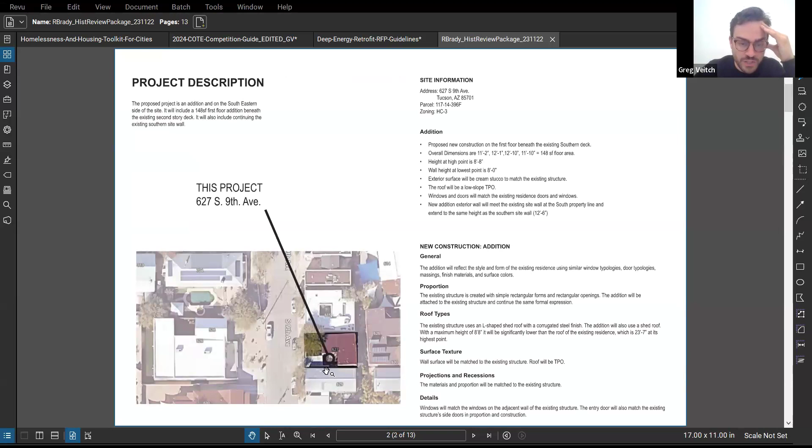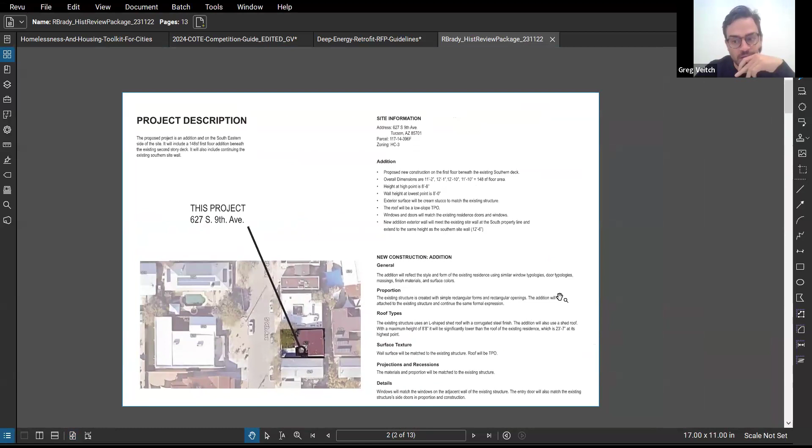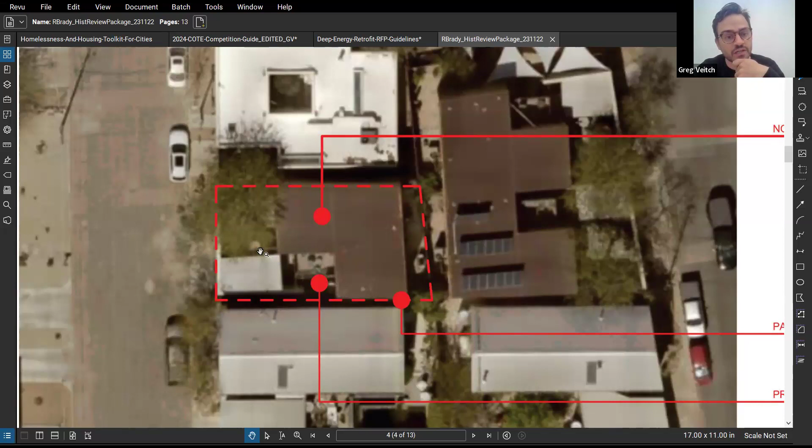This project is on South 9th Avenue, a Rob Brady project. There is an existing second floor deck indicated here, and the project will essentially fill in the space below that deck. Here's another aerial. It will have no change in the existing footprint. The carport will stay intact, and the front yard will stay intact where you see that existing tree. The one change, as Jody mentioned, is the recommendation to move a cistern, currently under the deck, back to the location next to the carport when that area gets filled in with construction.

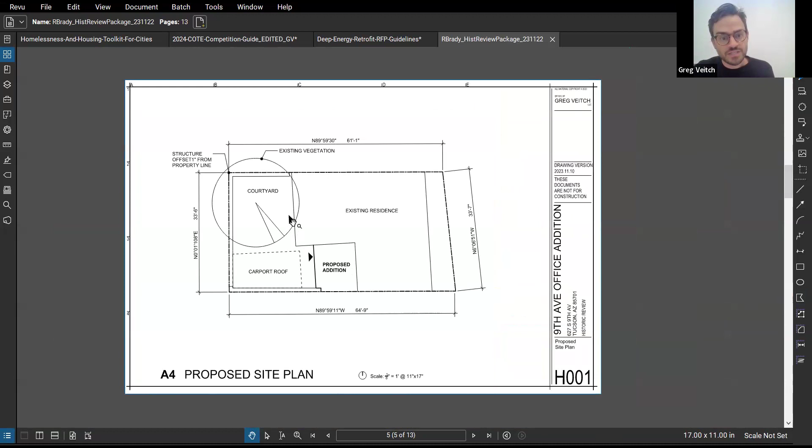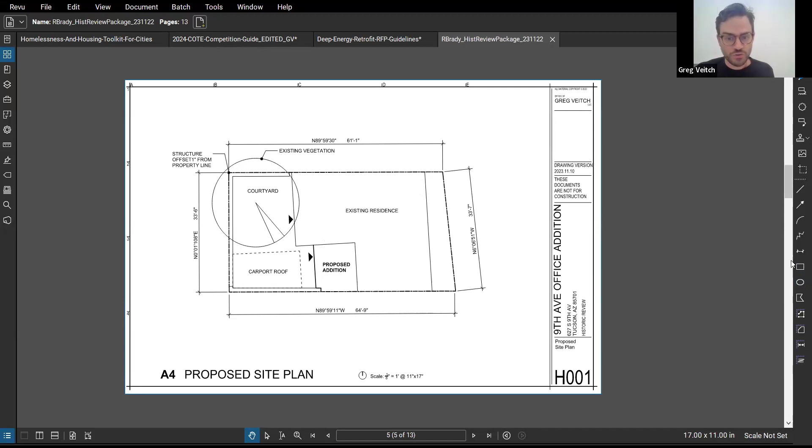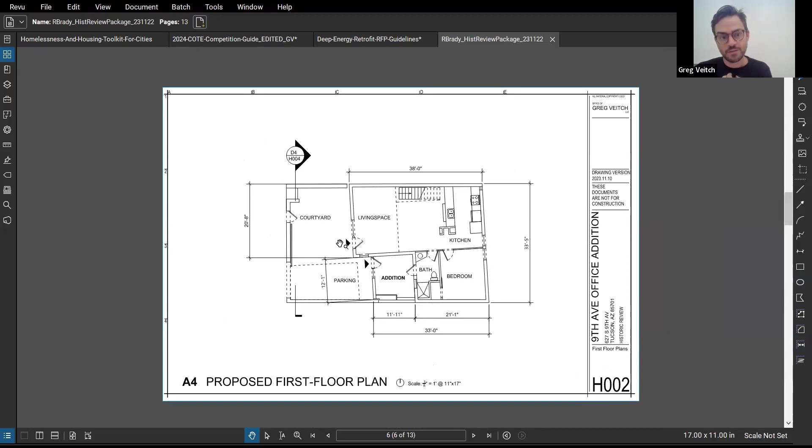Here's the proposed addition. We're currently proposing a secondary entrance, this is a studio essentially, so the existing entrance is indicated here. The proposed entrance will be connected and accessible through this residence, but it's going to have its own distinct use. There will be no changes to the existing residence on the inside or on any of the facades except for the filled-in addition, and the street frontage, the street wall, will not change either. Here's an idea of what it might look like: entrance, a window, some storefront, some storage, and maybe a connection through to the bathroom. Once again, the parking does not change, and the courtyard access does not change.

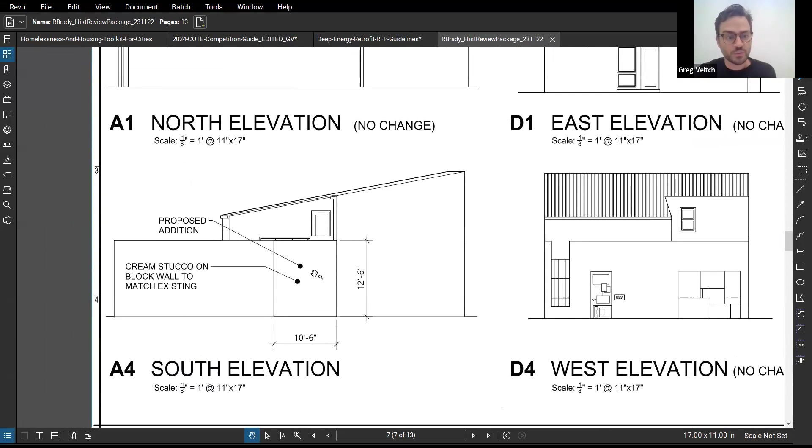So, west elevation, this is the street facing elevation, no change on this elevation, but I'll show one shortly where you'll see the addition. South elevation, this is the existing property line. It's built right to the property line since this is a commercial or office zone. There's currently a hole filled with galvanized corrugated metal that will be filled in with CMU and stucco to match the existing block wall. That's the side of the addition. The north elevation and east elevation have no changes.

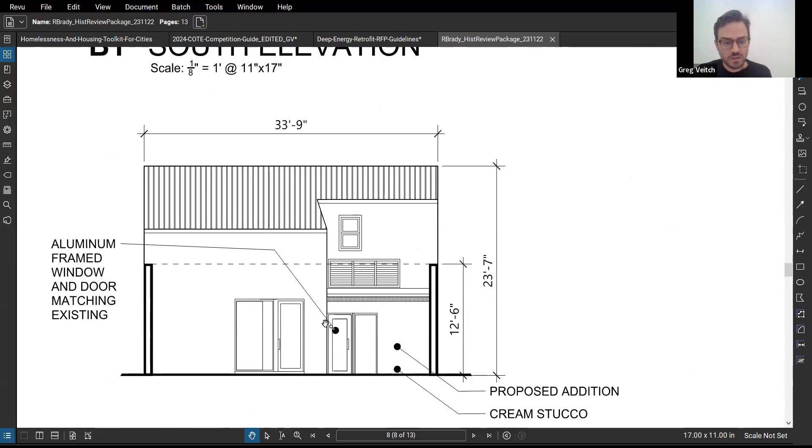So here's a section labeled elevation, but it's a section through the site walls. And here's the new proposed, basically front elevation of the house.

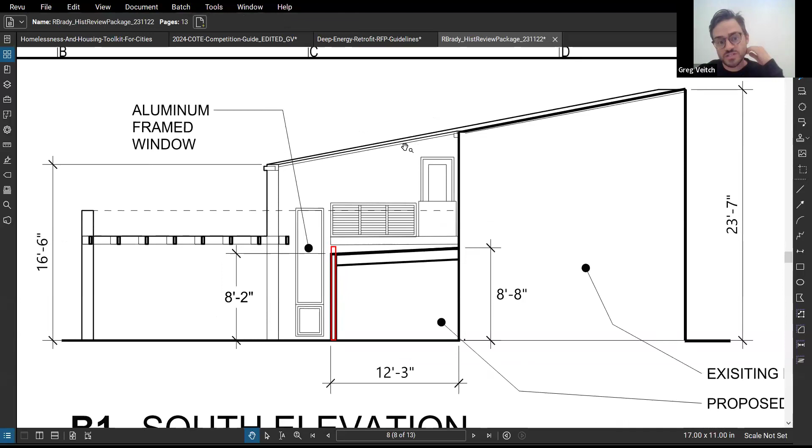The recommendation from the neighborhood board was to, instead of using a sloped condition, use a parapet condition such that the deck framing, which is steel, appears to hover above the parapet, filling in that space completely rather than being able to see any of that low slope roof, which would inherently not match the existing roof. The existing roof is rusted corrugated. This slope is too low for rusted corrugated, so we'd have to do built up TPO, EPDM, etc. So the recommendation was to go with the parapet that just barely touches or goes right below the existing structure.

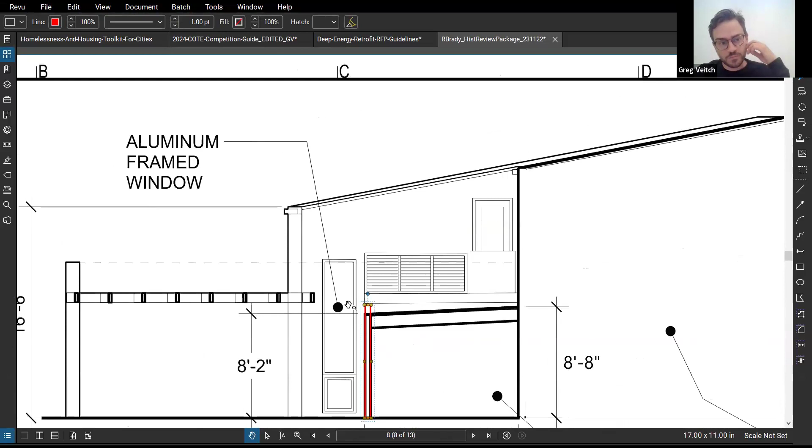The carport structure would remain unchanged. The existing aluminum framed windows and doors would remain unchanged, and our proposed door and storefront window would match the existing.

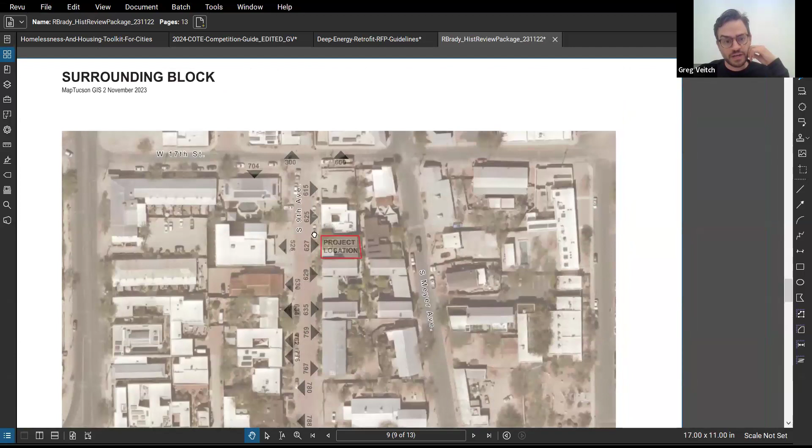So this is the location along the block. There's Meyer and 9th. And so we'll show some elevations now of these houses.

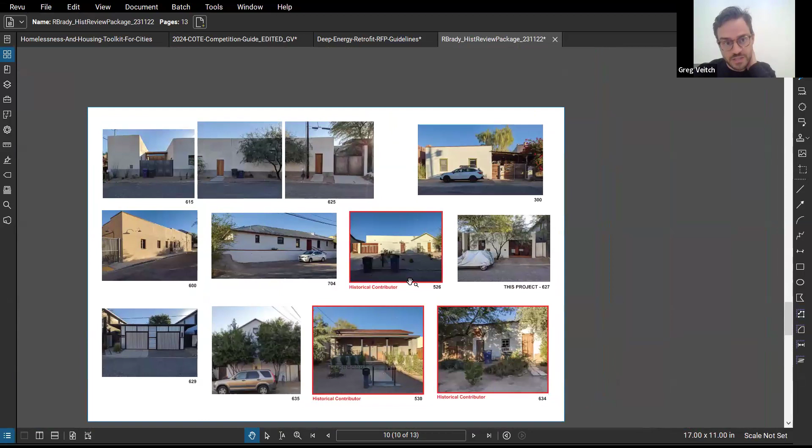And then highlighted are the contributing properties in the development zone. Right next door is a new residence that's just been finished at 625. That's actually right here, to the left of this photo.

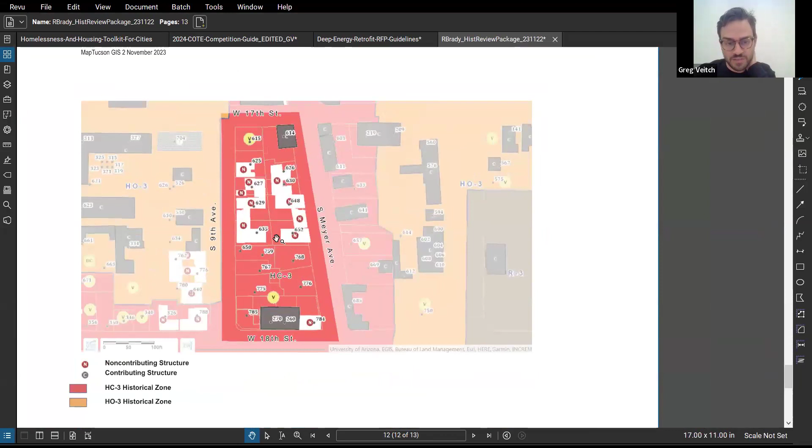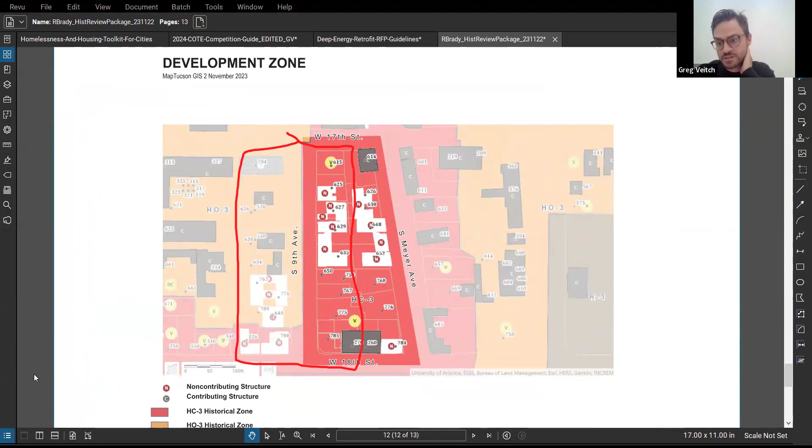And here's some more. And the development zone, I think this is slightly improperly noted, but the development zone is actually here. So apologies for that misrepresentation. And I think, let me just do one more slide here.

And then for roofing, we're going to go with a flat roofing system and finish. But once again, that will be hidden by the recommended parapet. And I think that's all I have for now.

Okay, thank you. Are there, who would like to start with questions? I can start. A couple questions.

The addition is in front of the bathroom. What happens to the existing window of the bathroom? The existing window of the bathroom will be removed. There is continuous mechanical ventilation, so we shouldn't have a problem meeting code.

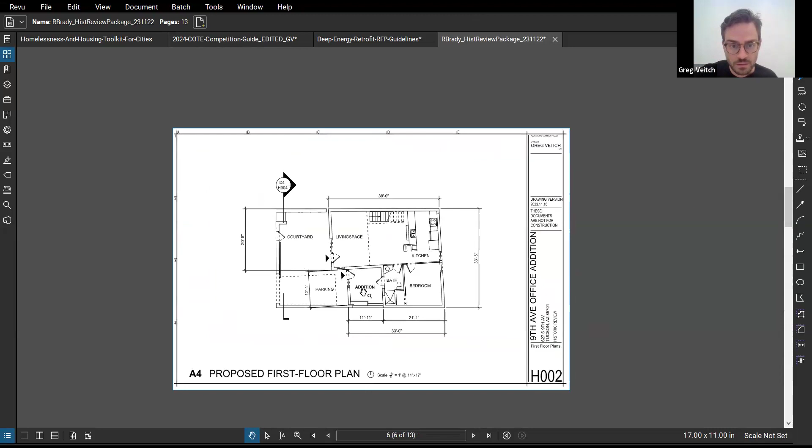Okay, yeah, I mean, that leads me to my next question is the HVAC strategy. There is, so let me note maybe on the plan here. Okay, so there is an existing exposed duct, spiral duct here. We're thinking at this point, doing a manual J-calc, making sure we have the right pipe diameter and doing something like this, potentially.

We're hoping not to do an independent mini split. We're hoping to keep it on the same system, basically. Okay, so no new exposed mechanical next year, I guess is the root of my question. No, definitely not. Definitely not.

Your drawings don't currently represent the west wall as a parapet condition, but you are acknowledging that the recommendation by the advisory board is that you are going to do that. Is that right? Correct. Okay.

And that, I mean, you're talking about new water service, electrical service, now a parapet condition, and also you'll need a scupper and a downspout. Correct. I think I know it's concealed from the street, but that's a lot of items that we don't see currently represented on the drawing. Okay.

So I guess we should note all that. Maybe you can talk about that - what would the location of the downspout and scupper be? What is the design of that?

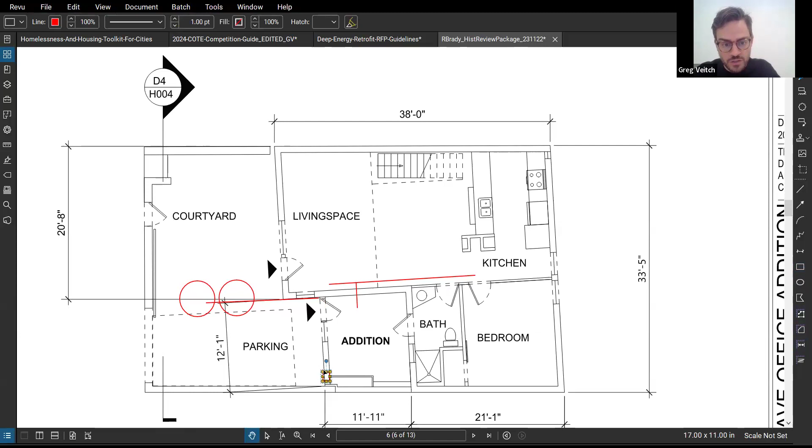Now, the existing cistern is placed in this corner. That cistern will be removed and moved back to this location. And the downspout, which is here and gets routed over here, will either drain onto the flat roof or we'll have to build it up. At this point we're planning on draining it to the flat roof and then having a scupper either above the door because it fits with the framing, or we'd move it over here, do a condition where we put it into the ground because of the height.

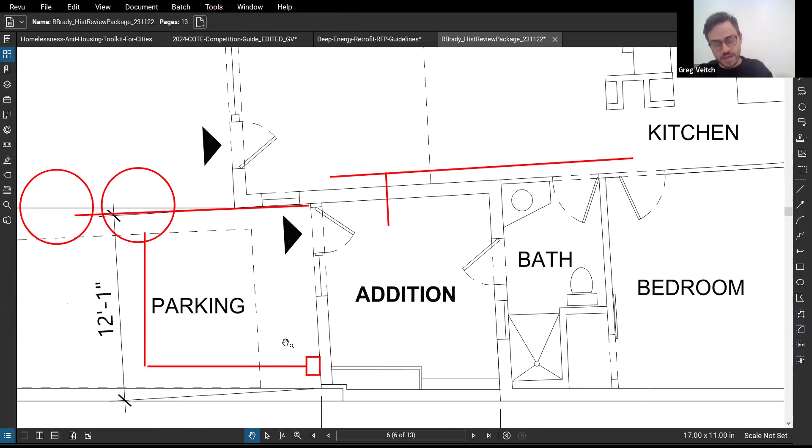We have the head - this is unpaved currently - and then we would put it into the cistern here. At that point we don't necessarily know yet. What we're proposing, regardless of the location of this downspout and scupper, it would match the existing, which is square stock rusted steel. It would either enter and do a wet system back up to these.

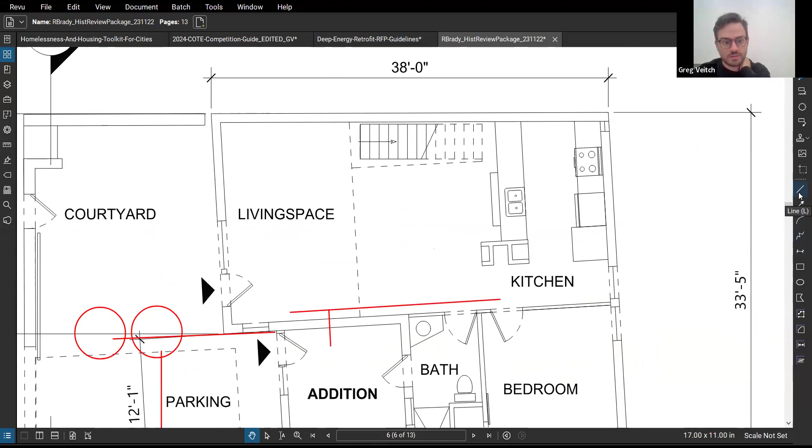Well, I guess it's like relocated because this is the original location - someone moved them previously. So they're relocated cisterns, but they're back where they should be according to the design. And there is an existing... yeah, I think that's actually it regarding where the cisterns are now.

So Greg, the cisterns will be moved per the barrio, correct? Correct, yes. To be clear, they will be moved back to the location indicated on the accessible construction drawings from this project. So it's going to be back at that original location.

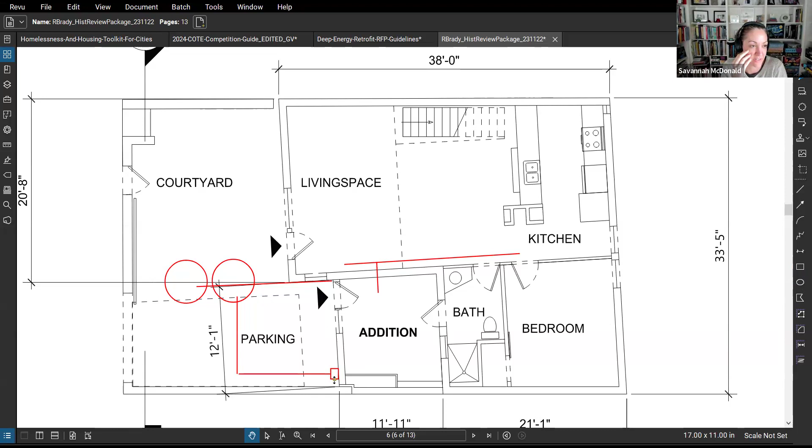Okay, Savannah, what else do you have? I think that answers all my questions. It's just a lot that's not represented currently in the drawings, but it all sounds fine and it gets concealed anyway from the street, so I think it's fine.

Thank you, Greg - we're just missing that in the drawing. So I guess we just have to be comprehensive in our motion, to include that, so that it's on there.

I have the Redfin pulled up, if you guys want to see where the cisterns were, like how it was. Yeah, can we see that, please?

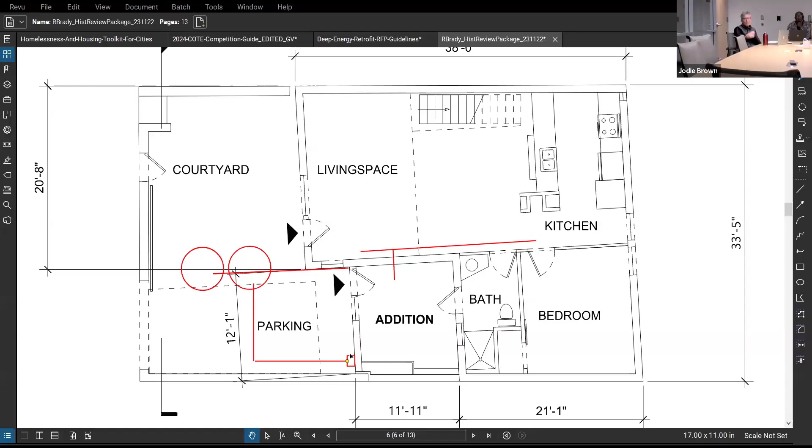Sorry, I was getting there. So those are currently in this location, and they would be moved. Sorry, one second. They would be moved to this wall here.

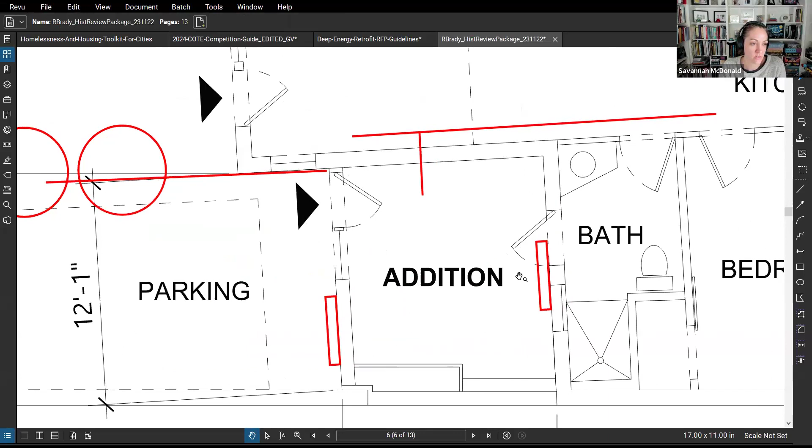Sorry, what does that represent? Electrical service? That is an electrical service and water service entrance, but say that's an electrical service entrance, it's all grouped together. Is that the location the neighborhood wanted it moved to, or a different spot from the one on the front of the addition?

That is what they, as far as I understand, recommend. The thing they also noted is that it needs to be screened in its current condition, so from the street it needs to be screened and less visually accessible. It's currently on the front of the house, so it's not any more screened than that.

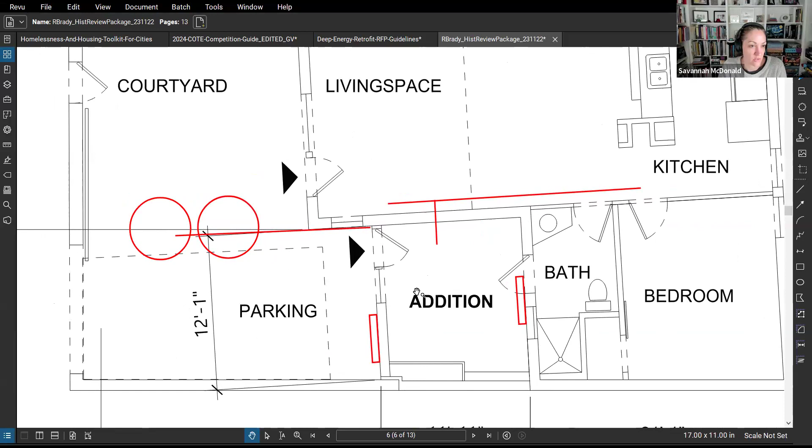Is that because you can see through the garage door, sort of? Sort of, let me get to that. So this is the condition—there is, you can kind of see some reflections off of the car inside. It's difficult to see, but it is possible if you moved up to the gate and looked in. Yeah, you can see through those.

Okay, so I have a question. What was the neighborhood's issue—was it the windows, even though they don't follow the design guidelines, to keep them? Is that because they're already in there? Because they're aluminum, and Barrio typically frowns upon aluminum windows.

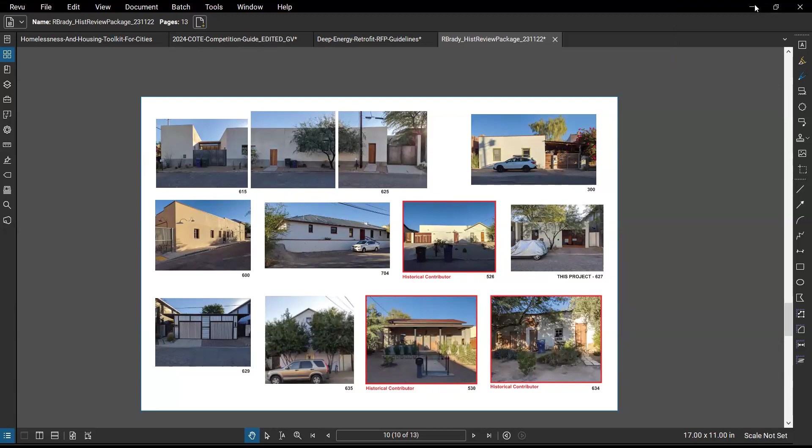But since this is a non-contributor and a recent build with aluminum, they weren't going to make him get wood. Okay, and these are already installed? On the house proper, the part that's already built. I see, okay, so any new windows would also be aluminum to match the existing? Correct. Okay, it just wasn't clear to me.

I'm sorry. Okay, Savannah, were you good on your questions? Yeah, I'm good, thank you. Jan?

I guess two things. One, on the utilities and the screening that Ario asked for—given all the metalwork around there, could you do some sort of metal screening of the utilities just offset from the front? I think you could, but per TEP guidelines you just have to space it pretty far off the front. So on the front elevation it is possible, but it would impede on the existing carport area.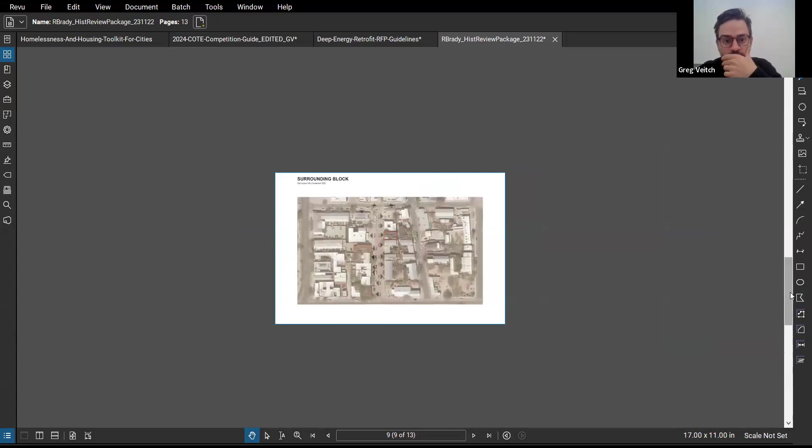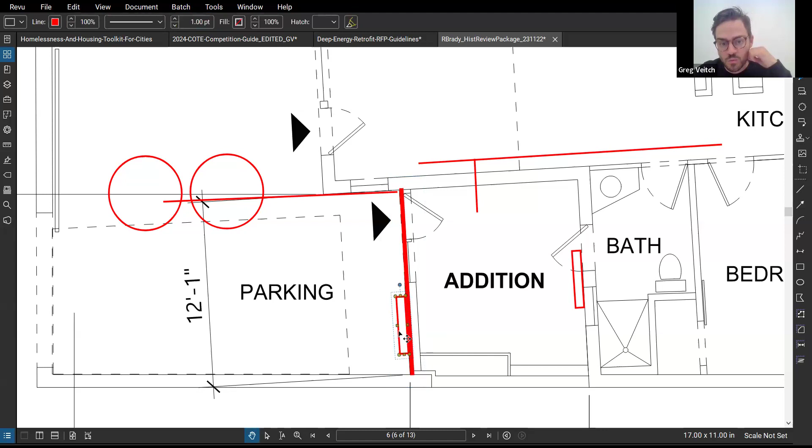Okay, and Jan, then you said there were two options for this, the cistern. One was more in the parking area, because one of them is remaining where it is, is that correct? And then you're relocating the other? Correct, you got it.

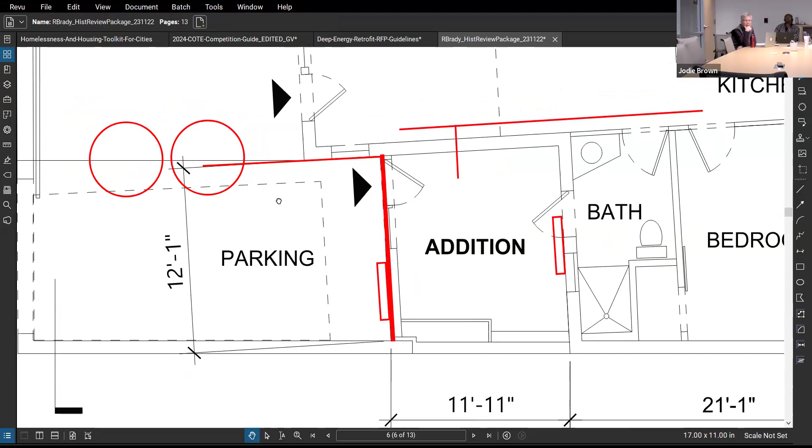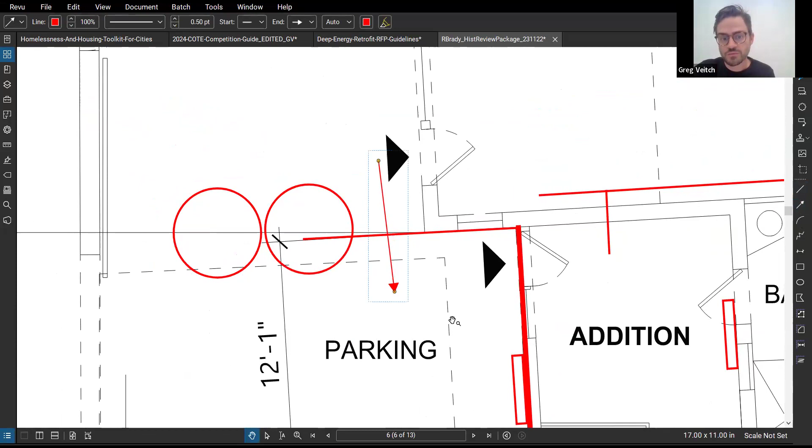So, but you showed two options for the relocation—you said one might be side by side and one might be closer to the addition. No, I think we would want the cisterns kind of in this—what we're using is the construction documents available to relocate those cisterns, and they're in about this location so you can maintain accessibility through this area here to the front door. What I was saying is what we're proposing is doing a downspout and then having a subgrade wet pipe system to this cistern, because we have enough head to make that work.

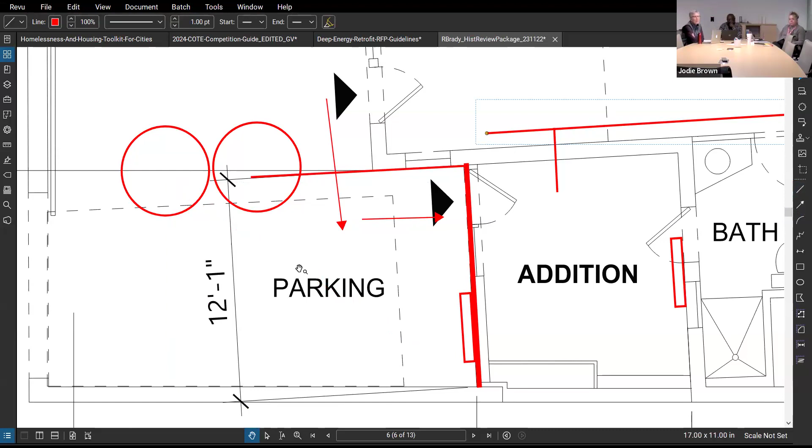Okay. Now, in your redlining, I thought you were showing us secondary options, so I got it. Okay, are you good, Jan? Yeah, I'm good, thank you.

Okay, Ricky or Joel? This is Joel. No, I thought the questions sussed out the issues that I had, and so I think it's a nice plan. Even though the windows aren't normally acceptable, I think they have a nice look for this non-contributing building, so I'm good. Okay, thank you, Joel, now that we've sussed it out with the questions and things.

Ricky? I just want to clarify, so on that window for the bathroom that's getting removed and stuccoed over—yeah, because that would now be enclosed in the new space. Okay.

I do have one other question. Do you know when you were planning on making these design decisions? Because it seems like you had a couple options here and you're not quite sure which one you're going to take yet. I know Jody and Michael need to see a plan with those included—do you know when you'd be making those decisions? Some of the decisions we've already talked about with the client after the neighborhood meeting, but we were looking to get feedback before making those decisions. I don't know if that clarifies at all, but I guess soon would be the answer.

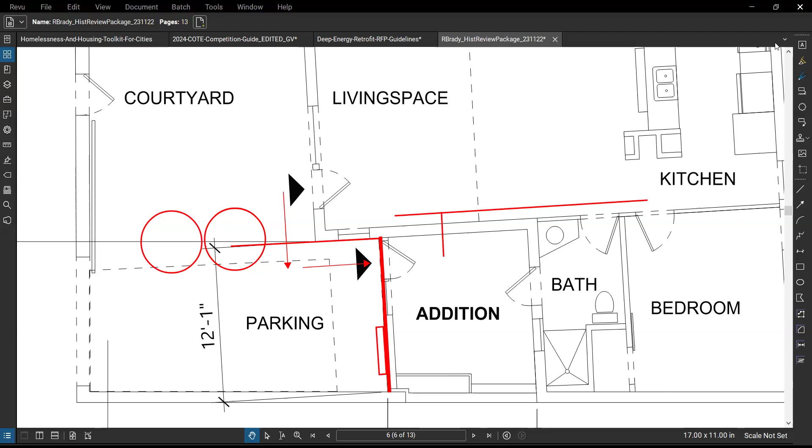And again, as Jody said, that would be depending on what the director decides goes in the decision letter. But we're pretty consistent with what the barrio is saying. Yeah, okay, that sounds good.

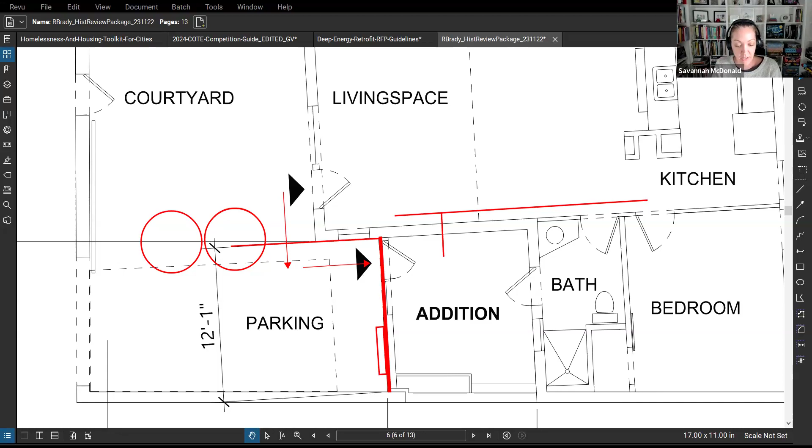All right, well, go ahead. On the matter of SD-1123-00134 at 627 South 9th Avenue, I move to recommend approval of the project as presented, including the noted described changes as acceptable within the following list:

That the cistern move to the original location, that the existing bathroom window be removed, that no new mechanical equipment be visible, that electrical and water service entrance move to the new wall and be screened to the extent possible by the existing garage door. The aluminum windows and doors are acceptable but should not set a precedent for the neighborhood. That the west wall be a parapet type that conceals the new roofing with a new square scupper and downspout rusted to match existing, and that plans be updated to reflect this for PDSD review.

Great, is there a second? This is Ricky, I'll second. Okay, nice motion, Savannah. Is there further discussion on Savannah's motion?

And I was distracted by Joel's cute dog. Sorry about that.

Anyway, so we'll go ahead, if there's no discussion I'll go ahead and call for a vote. Terry says aye. Savannah, aye. Joel, aye. Jan, aye. Ricky, aye. Thank you, it passes unanimously 5-0.

Greg, do you have any questions for Jody or Michael? Not at this time, thank you. Okay, great, thank you very much.

Okay, we will go ahead with item 3B, which is SD 1223-00144 at 945 North 5th Avenue. This is to renovate a garage to a hobby or guest room. It's a full review in the West University Historic Preservation Zone. It's a contributing resource. We'll use the rehabilitation standards.

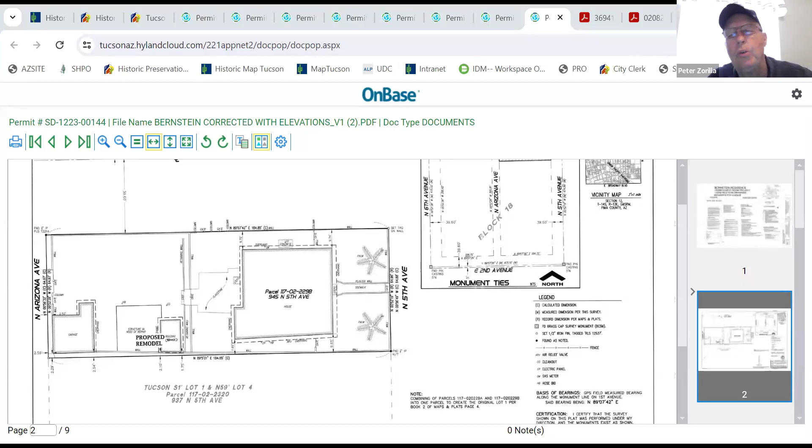Good afternoon, everyone. What we're trying to do here is there's an existing structure on the property that was a garage, and we are trying to reutilize it for a hobby and guest room.

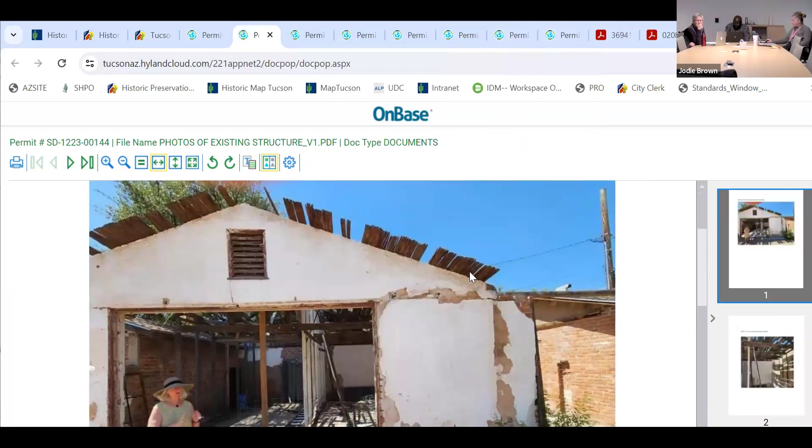If you look at the pictures, Jodie, can you get the pictures of the front? That's the front of the structure that actually faces the street. As you can see, it's in pretty bad shape.

Our intent is to take the header off the entire structure and rebuild using the existing lower walls, and rebuild a truss roof system at the same height as the existing structure, matching the roof system on the main house. We have the same shingles available currently to put on this old garage. We are going to extend the front out a little bit to put a patio of approximately 6 foot, but the shape of the structure stays the same, and the roof is the same on the extension.

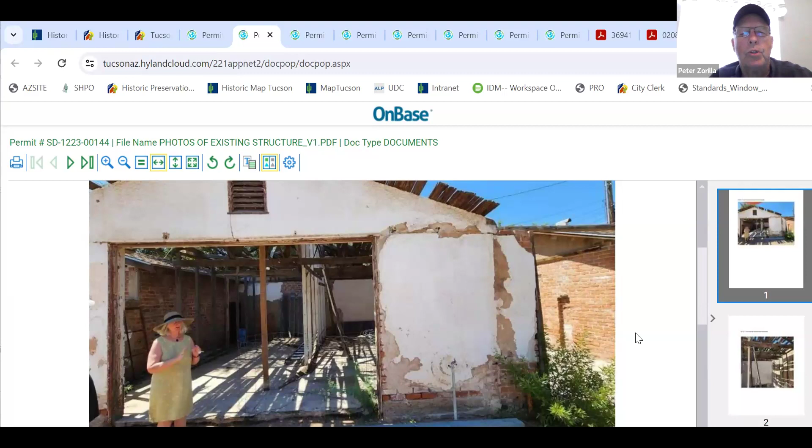What we're utilizing is the same wood windows as the existing residence. As you may have noticed from the previous comment, there was glass block planned for 2 of the windows, and we're now going to just make those into the same windows as on the regular facade.

You can see the situation on the property, so she's trying to upgrade everything and make it a usable space. And so what are those, wood double hung? What will they be, what type of window? They're wood double hung windows, which are on the residence.

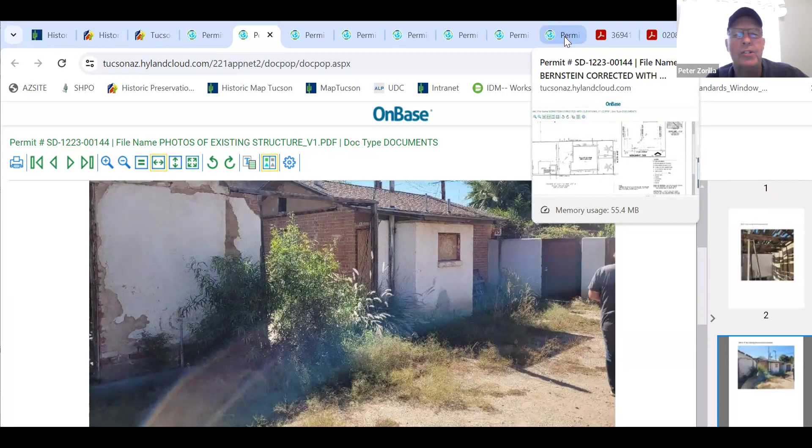She has a bungalow style, and we had stone on there around the stem wall that we were going to utilize, which the West University board didn't like, so we're removing that. But the windows are all going to match the existing residence. We're going to try to utilize the sand finish, stucco finish. The structure itself has 3 or 4 different types of finish on it from years of being repaired, so we're going to tie it all together with one finish.

We do have to extend the wall up on the south side for fire code. The building itself is a continuation of the actual south building wall that separates it from the other property. The original house was built in 1910. We're not actually sure what time this structure was built, but it has some looks of maybe a possible old carriage house from some structural issues on the inside that I noticed, but I don't know for sure. So we're filling in where the front, if you notice on the original picture, was just a big opening. We're going to use that for the garage door, and also a window wall to get a lot of natural light in there.

To the left, Jodie, where the sink is, that's where we have glass block right there. And then to the far right, upper right corner of the plan, that's where there was an opening before. We're not sure if there was a possible window there, but we were going to make that into a high window now instead of the glass block.

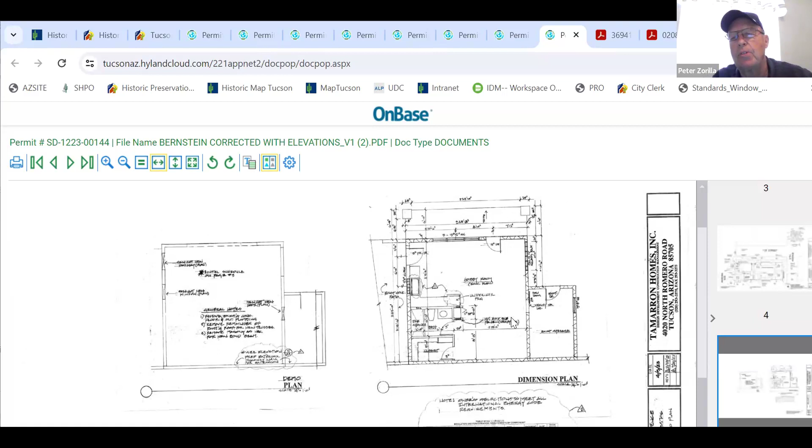Pretty much, we're just trying to utilize the existing structure as much as possible and bring it back to probably what you might say its original look. If you look at the front of the elevation right now, the north elevation, that door and the windows are where the opening is.

If you scroll down a little bit, you'll see the existing elevation as it is today. Okay, so we're utilizing the same kind of opening and filling in with the window and the door as access into the property.

We have to extend the south wall higher because of fire code. We are actually through building codes already and have been approved for everything except for the fact that we're on the lot line, and that's why we had to do the firewall on the south side of the property. We meet all other requirements per City of Tucson building codes currently.

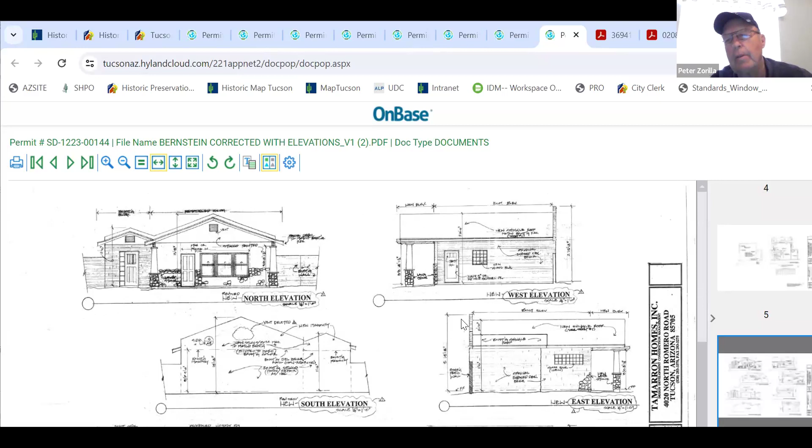I don't know of anything else, as you can see, we're just trying to utilize what's there, saving it and enhancing it. Okay, I have a question for Jodie.

It looks like only the renovation of the garage is not agendized, or is it everything? The house and the garage? It's just the garage. Yeah, so we'd only be talking about that.

So when the neighborhood talked about the glass block, it was glass block only on that one area of the garage, correct? Correct. And then there's no stone. This is the stone. Yeah, but it's on the house.

So what are we reviewing here? Well, that's the 6-foot porch addition onto the garage, right? Yeah, so they were originally proposing stonework here. Oh, I see. Okay, that wasn't clear to me originally. I'm sorry. Okay, yeah, so West University said no stone.

No stone. Okay, and then go over the windows again. So there's something, they wanted something different on the east and west elevations. Are we talking about on the main house? So they wanted no glass block.

The 2-light divided window on the east elevation and a double hung window on the west elevation. Oh, that was to replace the glass block that's on the west elevation.

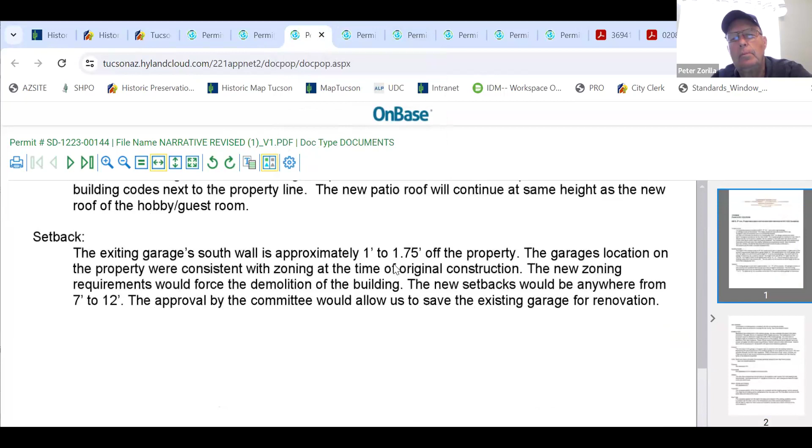Not 100% sure about that, because I don't know if I need to bring it to review, but this house has not been painted in 40 years. But I'm leaning towards the historic white color and the green that is shown on the back house. I'm a bit tongue-tied right now.

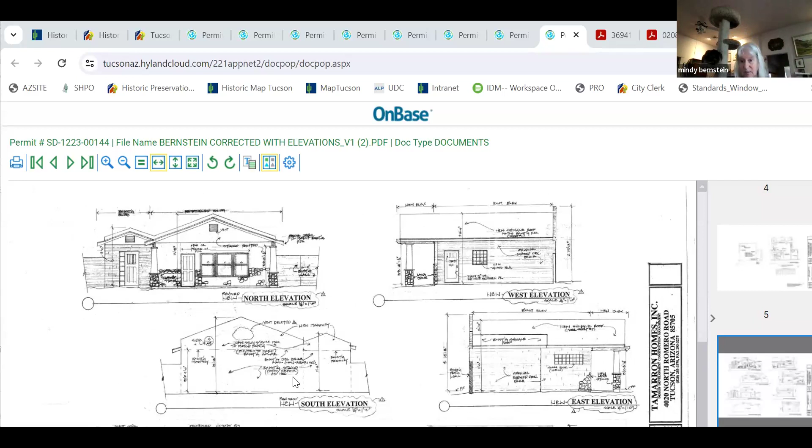Like painting the house green, or just leaving it a lime wash finish? I'm thinking about painting the residence I'm living in, that addition we're talking about, it's going to be the historic white, those colors stay. I'm planning on painting the main house probably the same historic white with green trim, but I have to make a decision quickly because the painter's going to be here in 2 weeks.

But I'm kind of leaning towards adding some maroon and other accents of green. So does that make a difference in the review of the casita? Well, we're not looking at the main house, we're looking at the casita you're renovating, so that's the color we care about. The color for your main house still has to meet the standards of the neighborhood, but regardless of what you're painting your main house, it isn't going to affect our ruling on this, because we're only supposed to be talking about what you're painting your casita and what you're doing to that. Okay, thank you.

Yeah, and just to clarify, I just wanted, for context, to understand the color selections. I think they're fine, I just wanted to put it on the site and understand it better.

And on that note, do you see this casita or hobby room from any of the streets? It's very hard to see. I've seen photos of each of the street views, and it's kind of difficult to see because there's a 6-foot wall around the property.

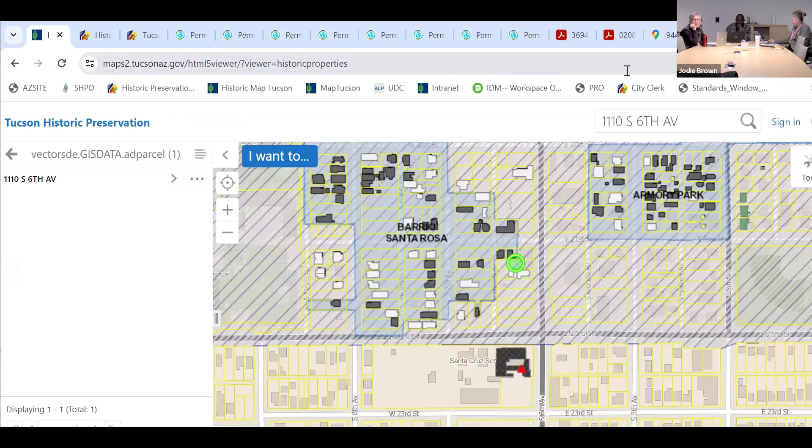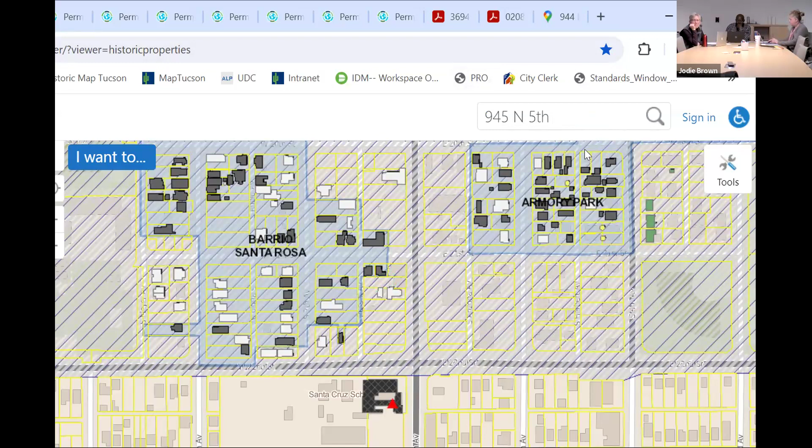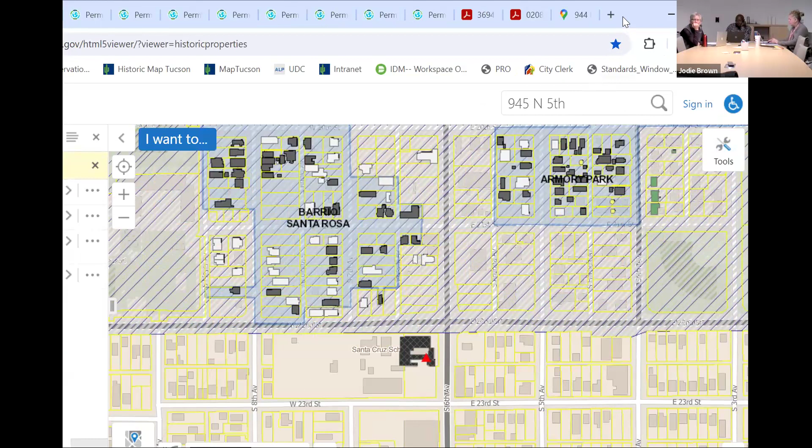Jodie, it's kind of right there on the corner. Yeah, I can bring it up if you want me to. So I'll bring it up. Now it's not working, now it's being persnickety. There, right there it is - it's off on my screen. So yeah, here's the house.

And all around it are contributing. Okay, but this particular structure is not, right? They are showing that it's not, yeah. They're closer to Arizona than the other streets.

Is there a view? I didn't see a photo from Arizona. I think it was Google. Yeah, this is the Google view from Arizona. You can kind of see it, it's right here. So there's another garage there too. Is that right? Yeah, this is a garage. It's all the same.

So is it an issue that this is listed as contributing and it's not, with the little structure, the garage, the tiny building that's being renovated? Or do you think that's a mistake? No, the main house is the contributor. When I listed on the agenda, is that what you're asking, like that it needs to be mentioned? Yeah, because that's repeatedly a question we have. So really, the garage is not a contributing resource, it's just the main house that needs to be mentioned. And then it seemed like the presenter was confused why we were hearing about the house.

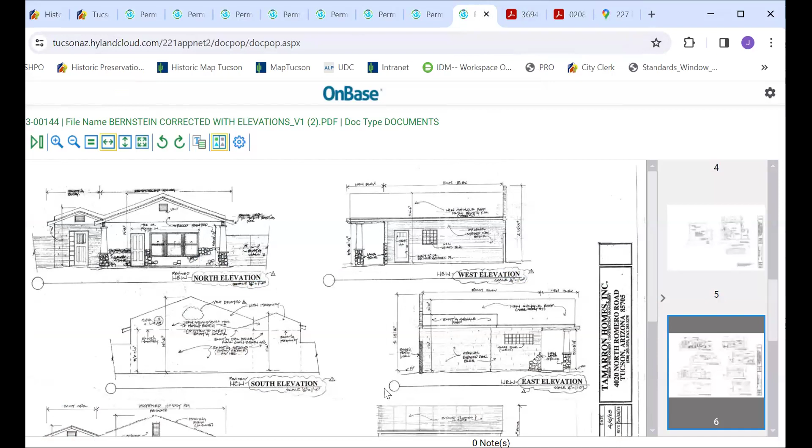Yes. Is that you, Miss Ricky? Yeah, okay, let me, I did not take notes, give me a second. Oh, it's because you weren't here. And we can watch you take notes, see you're on your own. I think it's very similar to the advisory boards, right? Yeah, so no.

No, what is that, brick? Or is it technically lava rock stone? Or stone? Yeah, rock veneer. No, rock veneer. The windows, no glass block windows, instead double hung wood windows. Got the West University guidelines pulled up. Okay Ricky, do you wanna know what West University said? I got it. Oh good, there you go.

And I would say instead of removal of the stone features, it is really a stone veneer, right? Yeah, correct, yes, it was a stone veneer we were putting on. Okay, I just see mine says no rock veneer and no glass windows, we instead recommend double hung wood windows. Is it double hung on the west, and I think two light divided on the east? Yeah, yeah.

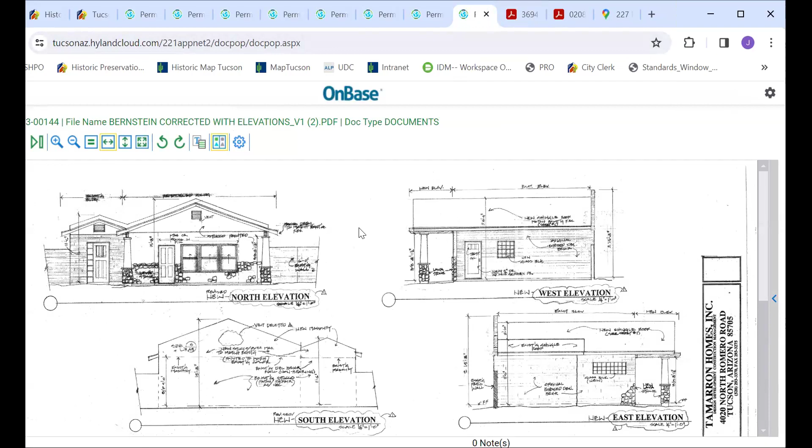Okay, all right, so if you're ready, go ahead Ricky. On the matter, let me make sure I'm reading the right thing. Bring that up again, Jen, bring up those bullets, thank you. SD-1223-00136, 528 South 3rd Avenue. Recommend approval as presented with the following notes. Wait, isn't that the wrong thing? Yes, did I pick the wrong thing? Oh, because I scrolled too far. I'm gonna restart.

On the matter of SD-1223-00144, 945 North 5th Avenue, recommend approval with the following notes: that there's no rock veneer, that there's no glass block windows on the west and east elevation. Instead, that there's a double hung window on the west elevation and a two light divided window on the east that match the design guidelines per West University. That there's a heavy sand stucco texture on the building, ensuring all other materials used are consistent with the West University guidelines. Is there a second?

I'll second. Is there further discussion? Can I just note it's heavy sand, not heavy hand? I said hand, but that could be me. I have it written down as sand, but I may have read it wrong. Okay, can we make that a silent correction, Jodie, rather than a formal one?

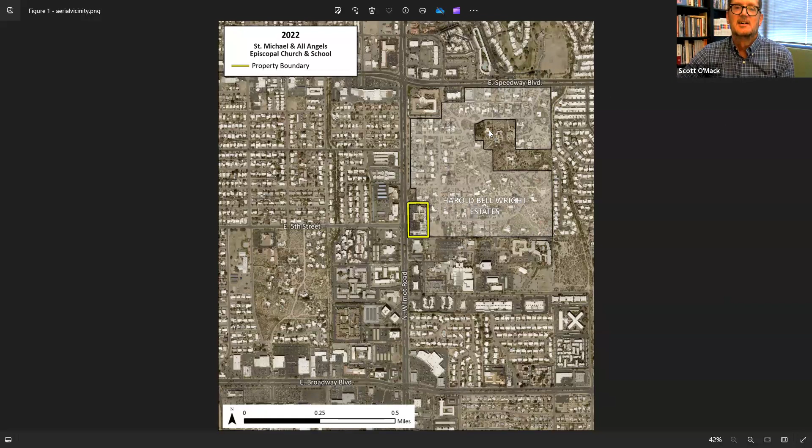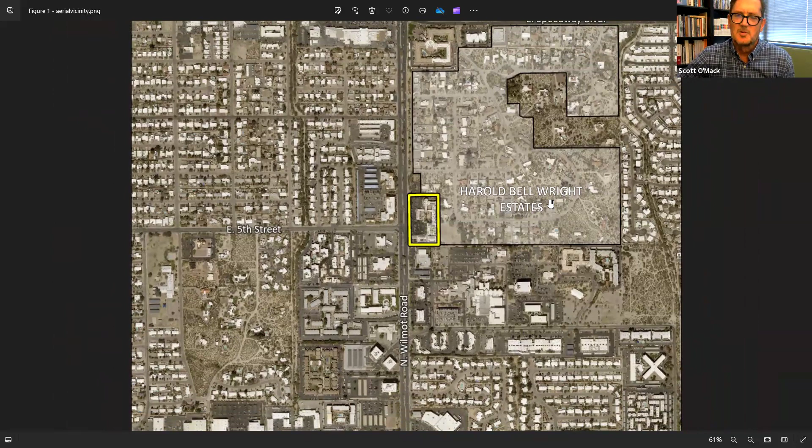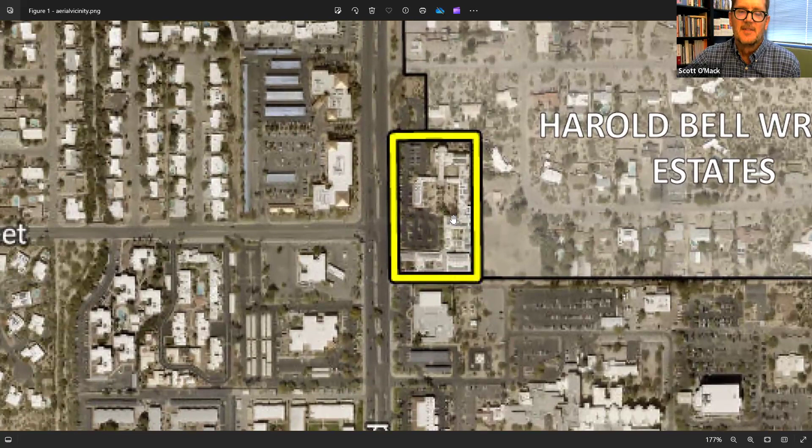Just to give you an idea where we are: this is Broadway Boulevard on the south, Speedway up here on the north. This lightly shaded area is the Harold Bell Wright Estates, a residential historic district on the register. This spot, not included in that district, is Harold Bell Wright's house, which is itself on the register, but individually. This whole development came into existence not long after World War II, in the early 1950s. St. Philip's Episcopal Church, another Joesler property, bought this parcel to build St. Michael's as an expansion or auxiliary church to St. Philip's.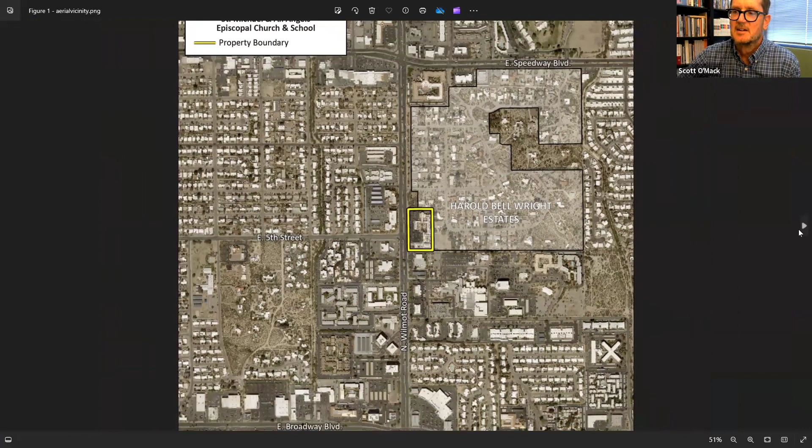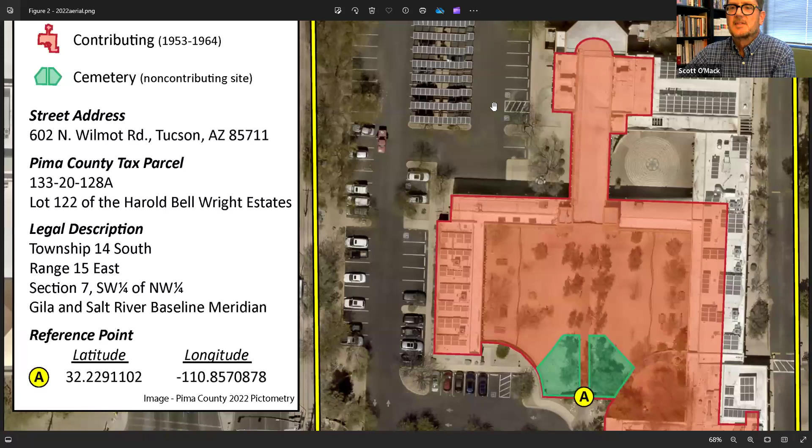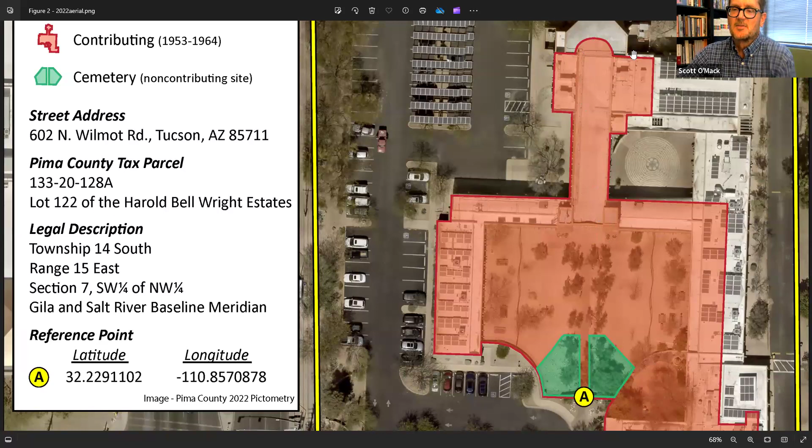This is it today, with an overlay of the contributing portions of the building. Zooming in, this here is the expanded nave, designed and built in 1964 by Gordon Maas Luepke. This is the original wings of the church, designed and built in 1953. These wings added onto that were part of Joesler's original design, but were built after he passed away, by Luepke. And this area is the parish hall, built by Luepke around the same time as the church expansion.

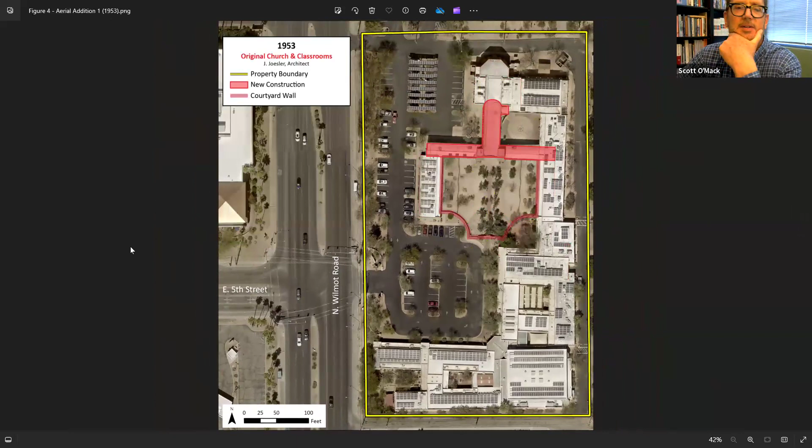We can show a sequence of things a little more neatly than that. Let's see. This is the footprint of the original church by Joesler—a much smaller nave, the small sacristy on the right side, the two wings at the south end of the church, and the courtyard wall with the gate here.

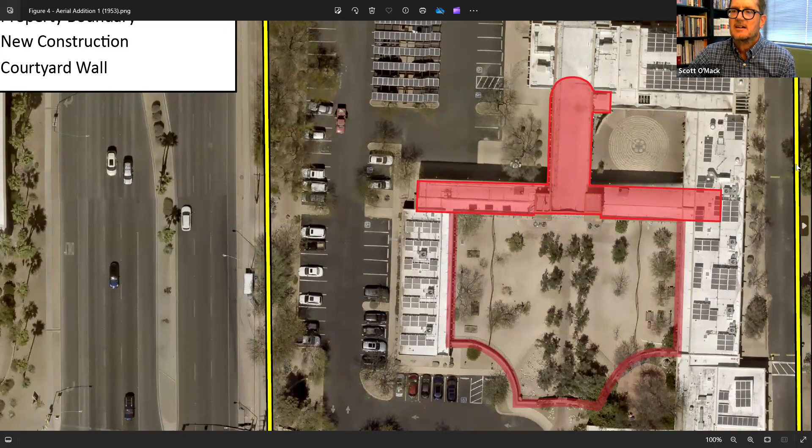That survives, but the next step was in '55: one of the wings that Joesler had originally designed was added. Then another wing on the other side by Luepke, and also the parish hall. Then the expanded church—basically the north end of the original nave was taken out for the expansion. This was built in 1980, pre-Bob Vint; I've forgotten the architect's name. Then basically everything after that, from 1993, was designed by Bob Vint—all these pieces.

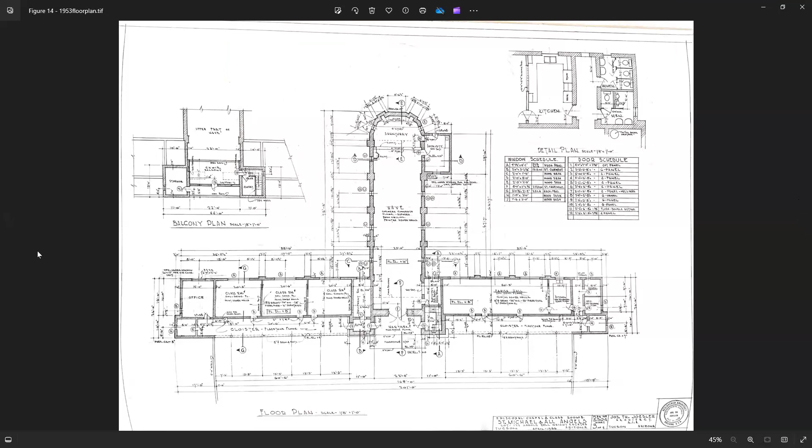And that's the final footprint today. Nice, that's a really nice way to present that. I appreciate the thoroughness of how you keyed the maps. You're very clear about the integrity, about who prepared the nomination. You wouldn't believe some of the things that we see.

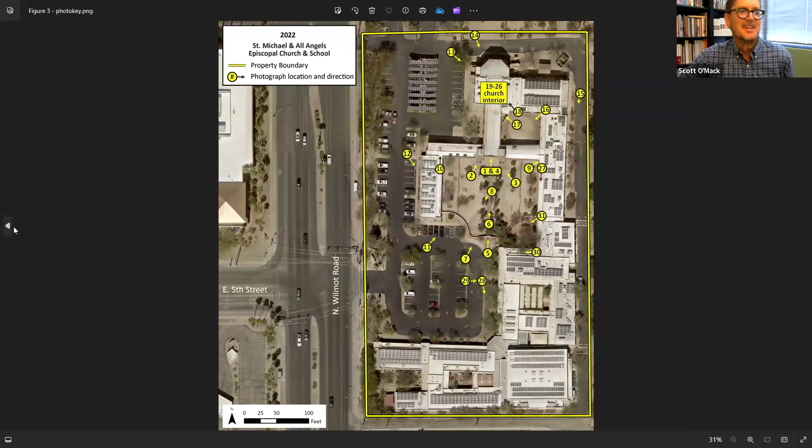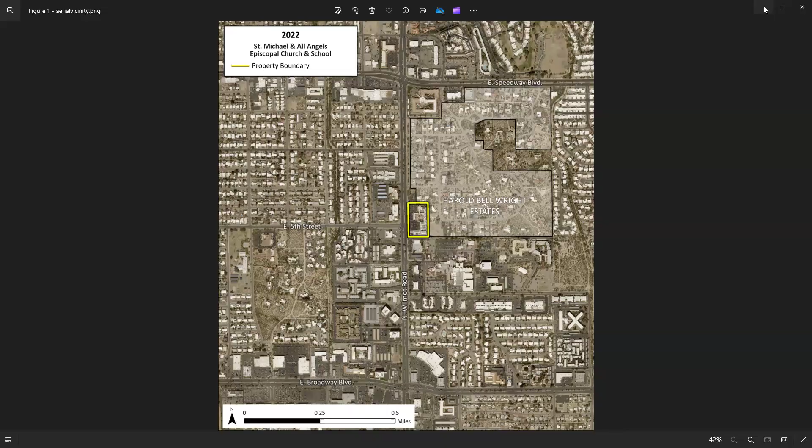Well, Ian is a whiz with the GIS map, so I can't take credit for that. But it's a beautiful presentation as far as I'm concerned, the whole nomination, very easy to follow. I was impressed with the statement of significance. I like the tight period of significance you covered. It seems totally justifiable to my mind.

I don't know what the rest of you think, but any last thoughts, Scott, or can we take some comments here? Yeah, please, comments or questions. Okay, I'd like to start with your comments or questions. No, I can start, this is Ricky. Thank you for the really thorough presentation.

I especially like that part at the end where you could see how it was added on, because it made sense with the pictures, but seeing that overview really helped clarify it since there's so many additions that have happened there.

We debated just doing one figure showing all of that, but it got too crowded, so we did that sequence and that worked out. The period of significance, especially having seen that map, makes a lot more sense for why you picked that, because there's just been so many additions all the way up through 2017. So I'm in agreement, just thank you.

Great, thank you, Ricky, thank you so much. I just want to chime in on that. So when we were considering it, the idea is that I think everything that came after Luepke, it's not that...

it can come into significance as it ages through time, because it's done in such a way that it honors Joesler's original vision and style, but it's distinctive enough and sequenced enough that as the property continues to age, we set the boundary as the entire property, understanding there's integrity of style that will be maintained as it ages. But we had to work with SHPO to understand that it's one building in terms of the property, but the current boundary for the nominated property, contributing and non-contributing, is that smaller Joesler Luepke footprint.